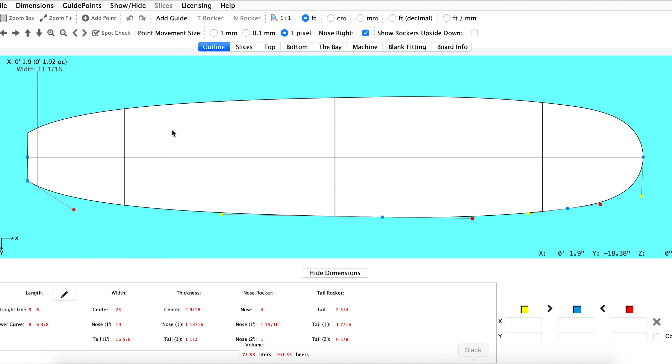I'm gonna go ahead and put that board together for you using that image, so let me just show you how I would do it. We have the image here, so let's try to find something that's a little close to that. A 6.0 shortboard probably would suffice, so I'll start with that and go ahead and open up the image. I just saved it to my desktop.

There we go, it actually looks like it's pretty almost right there in zone, so let's start to position this image in here. I'm going to show the board not filled for now, just so we can get it all lined up. I'm using the N and T tools or keys to push this into position.

And I guess for what we're going for today, that actually would probably work right there. So now we can start to pull the board together, or the outline I should say. It's pretty straightforward. Might need to play around with those edges a little bit if you don't want them as sharp as they are, but let's see what we got here.

So yeah, I'll just line it up. I'm looking at the whole board, but I'm mostly using the top rail up here, our top outline, to kind of get it into position.

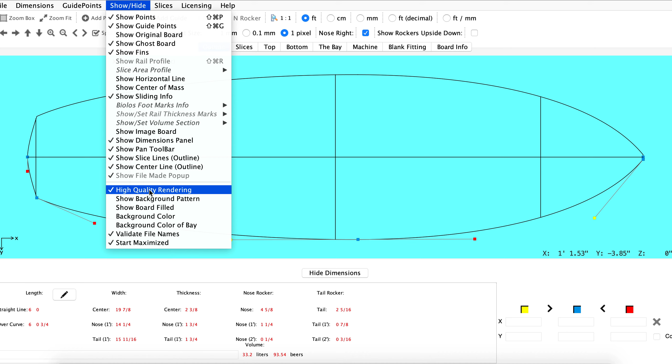It's looking pretty good. Maybe want the nose a little bit pointier, but it should be okay. So we'll get rid of the image so we can see what we're working with here, and I'll do show board filled. That's kind of how to put the outline together.

Let's see what else you sent me. It looks to me like you do want this edge on the rail. I'll go ahead and put this in here for you now - I don't know if this is exactly the end state of the board, but just to show you how to get that together.

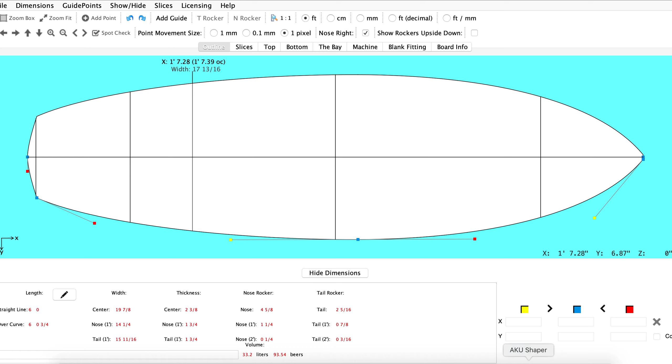Go into the slices, we'll find our center slice here, and then we'll start to pull this flat. We start getting it where we kind of want it.

So we're kind of achieving what we're going for here. I'll just keep pushing this out so we get it dialed in there. That's how you could make this rail with that edge, by adding this point in here.

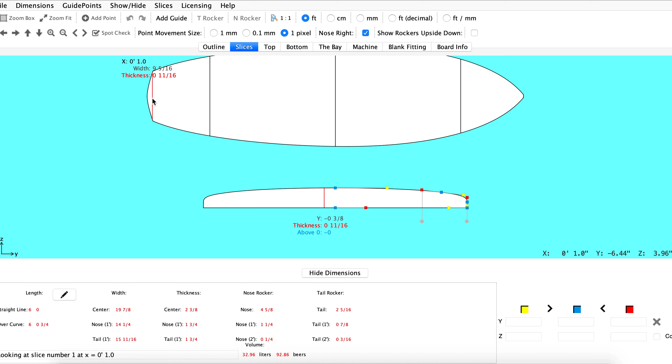And then obviously you can get it to your liking, but for now I think that's probably a decent starting point. Then what I would do to get that edge all the way across the top deck line is start taking out these slices - you can add them back in. What you could do is, if you want to keep this top rail line the same but change the bottom transition, you could do a file export slice.

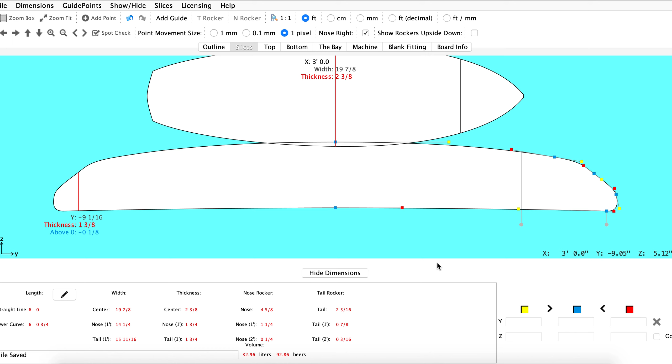Just save that, and then we could import this same slice in. It's going to ask us where to put it, so I'll put it a foot from the tail. And you can see it just duplicated that slice, but auto-adjusted it.

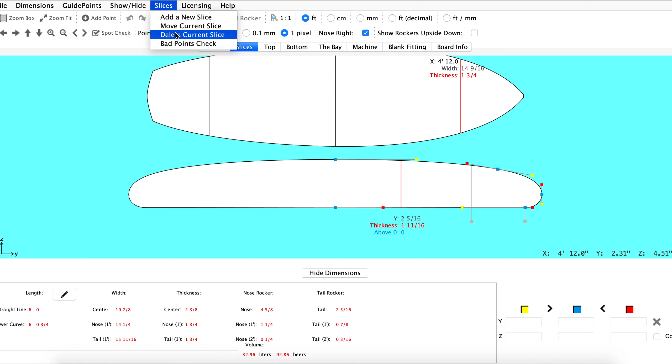Same for the nose. If you actually take this out, it should blend all the way into the nose now. But if you wanted that slice at the top, same thing - you would just import that slice that we had used. This is board 6.0, so we'll go a foot off the nose.

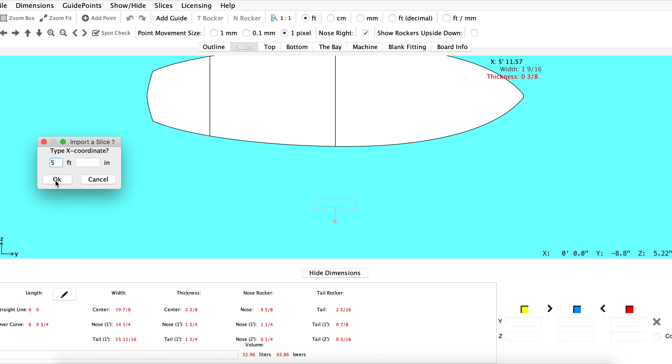Then obviously we'll get in the rocker - I didn't see what you wanted for that, but now you can see how that edge kind of trails the entire board. Looks like it's a bit more pronounced in the picture you sent, but I think you can get the idea where you could pull this up and make it more flat.

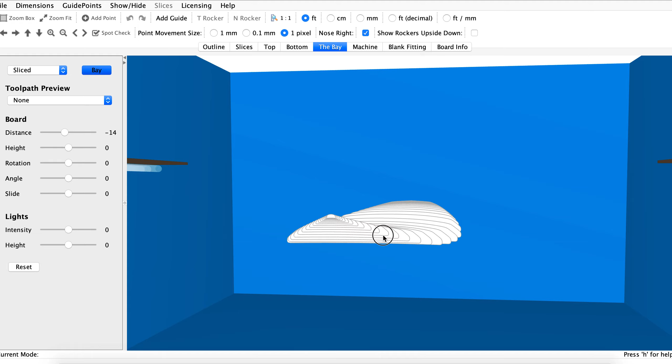So you can see that rail in here now, but that's essentially how you'd go about starting to put that together. Let me know what you think, and if we want to make that rail line a bit more pronounced, let me know and we'll put it together.